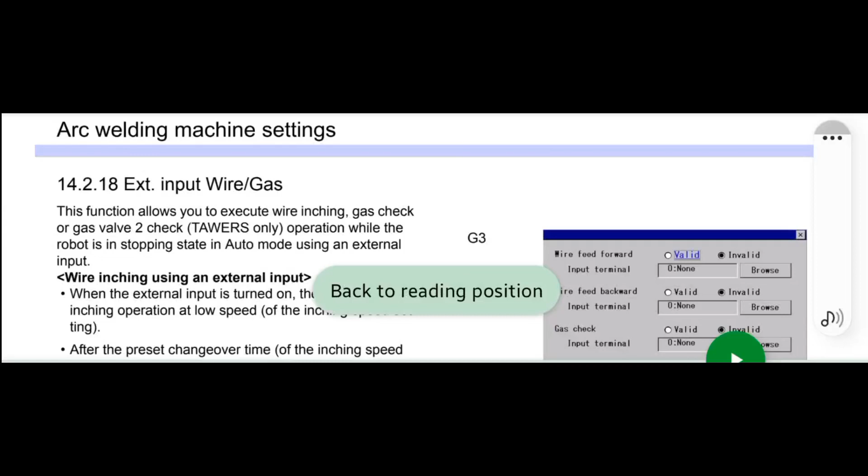14.2.18 Ext. input wire, gas. This function allows you to execute wire inching, gas check, or gas valve 2 check, TAWERS only, operation while the robot is in stopping state in auto mode using an external input.

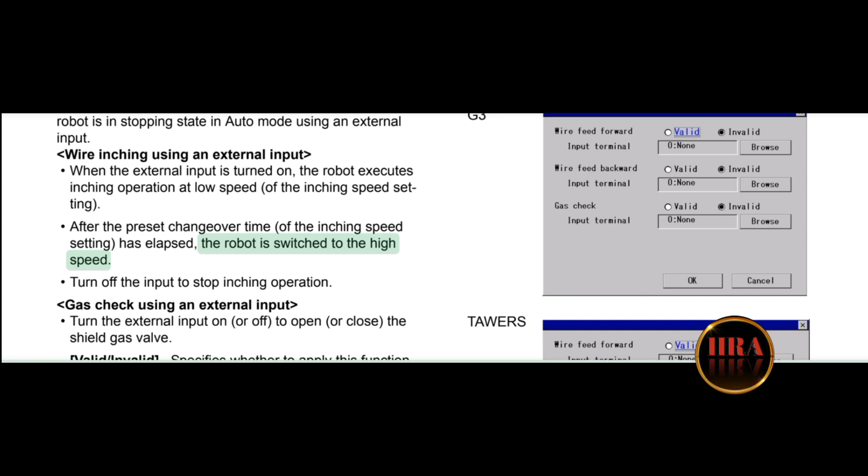Wire inching using an external input: when the external input is turned on, the robot executes inching operation at low speed, the inching speed setting. After the preset changeover time of the inching speed setting has elapsed, the robot is switched to high speed. Turn off the input to stop inching operation.

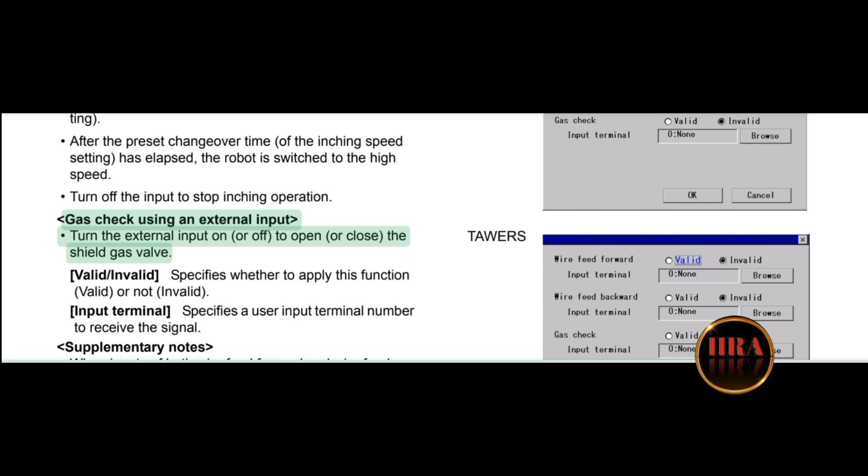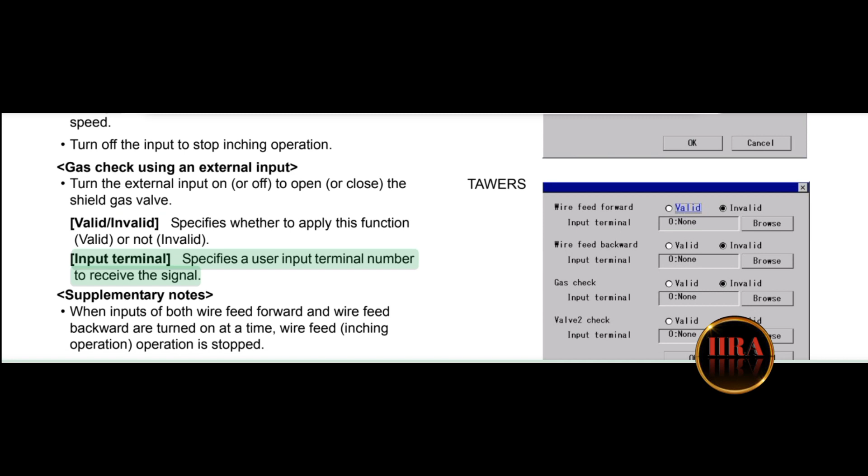Gas check using an external input: turn the external input on or off to open or close the shield gas valve. Valid/Invalid specifies whether to apply this function. Input terminal specifies a user input terminal number to receive the signal.

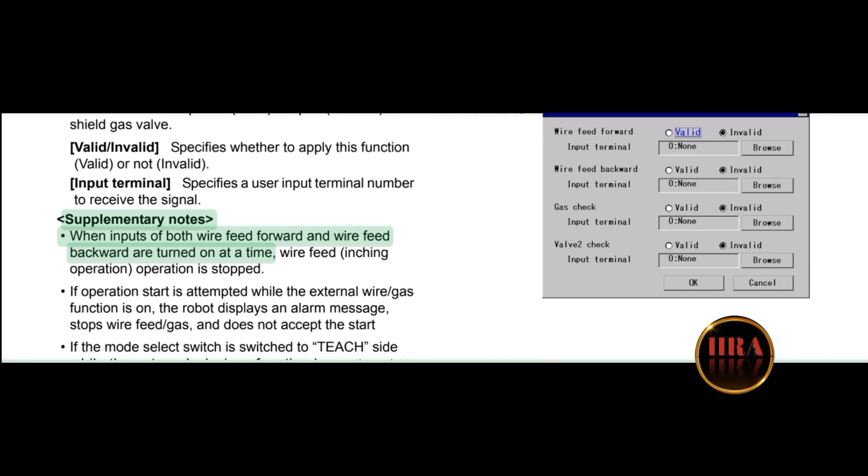Supplementary note: when inputs of both wire feed forward and wire feed backward are turned on at a time, wire feed inching operation is stopped.

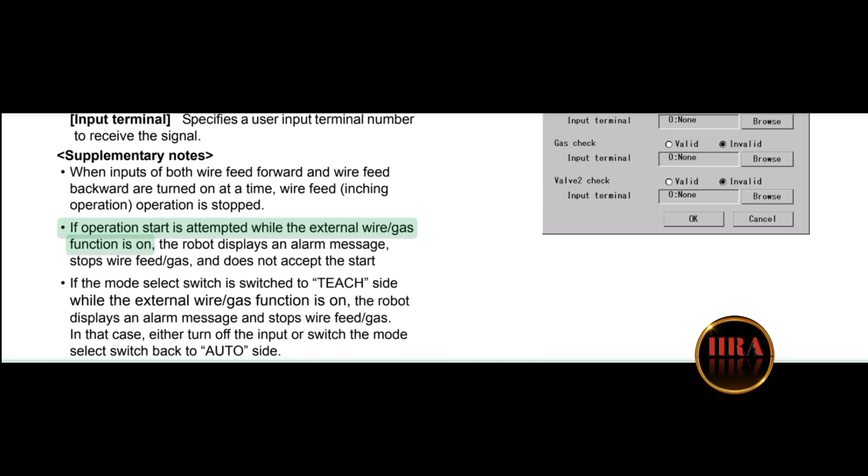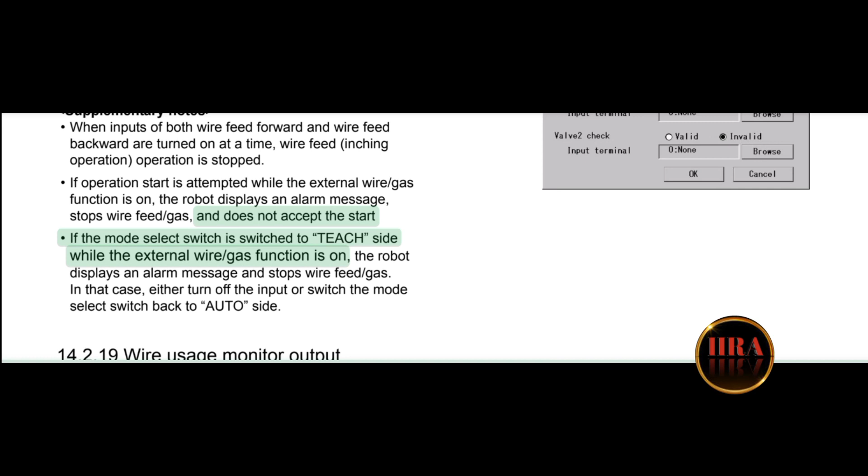If operation start is attempted while the external wire/gas function is on, the robot displays an alarm message, stops wire feed and gas, and does not accept the start. If the mode select switch is switched to teach side while the external wire/gas function is on, the robot displays an alarm message and stops wire feed and gas. In that case, either turn off the input or switch the mode select switch back to auto side.

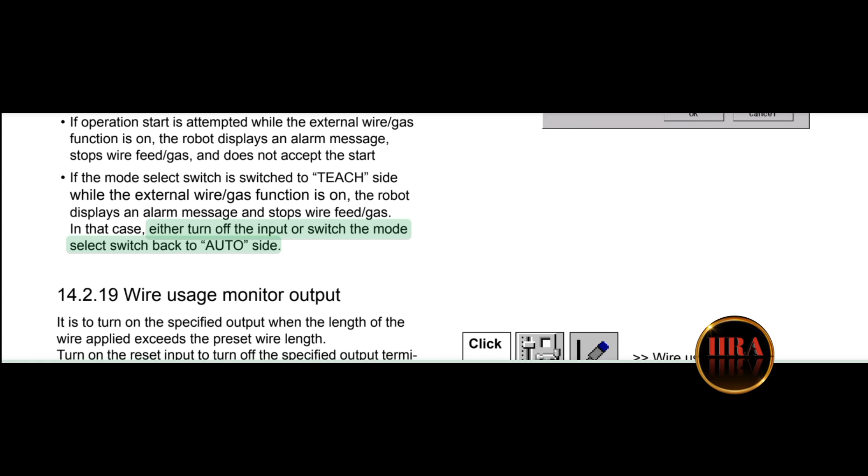14.2.19 Wire usage monitor output. It is to turn on the specified output when the length of the wire applied exceeds the preset wire length.

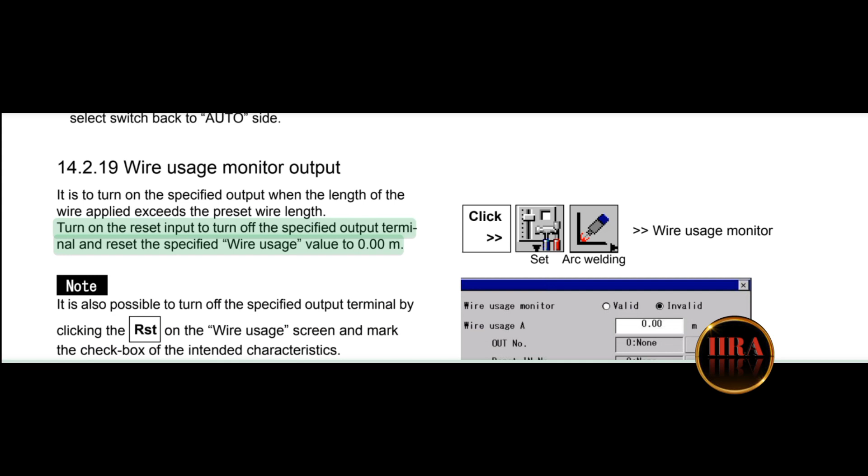Turn on the reset input to turn off the specified output terminal and reset the specified wire usage value to 0.00 meters. Note it is also possible to turn off the specified output terminal by clicking on the wire usage screen and marking the checkbox of the intended characteristics.

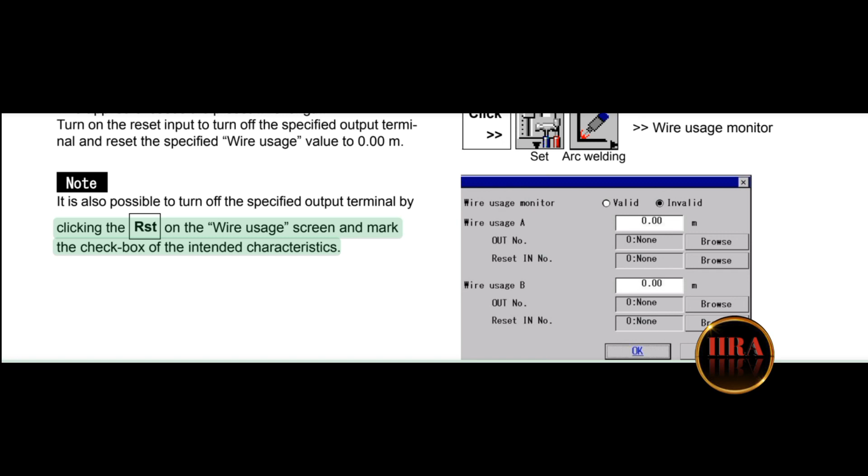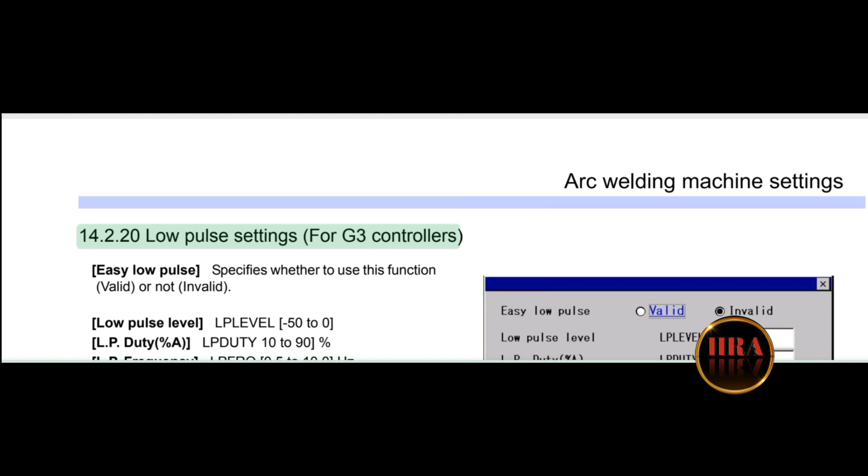14.2.20 Low Pulse Settings for G3 controllers. Easy Low Pulse specifies whether to use this function, valid or not invalid. Low Pulse Level, LP-LEVEL, -50 to 0, LP. Duty %A, LP-DUTY, 10 to 90%. Frequency, LP-FRQ, 0.5 to 10.0 Hz. Delay time, LP-DELAY, -20 to +20.

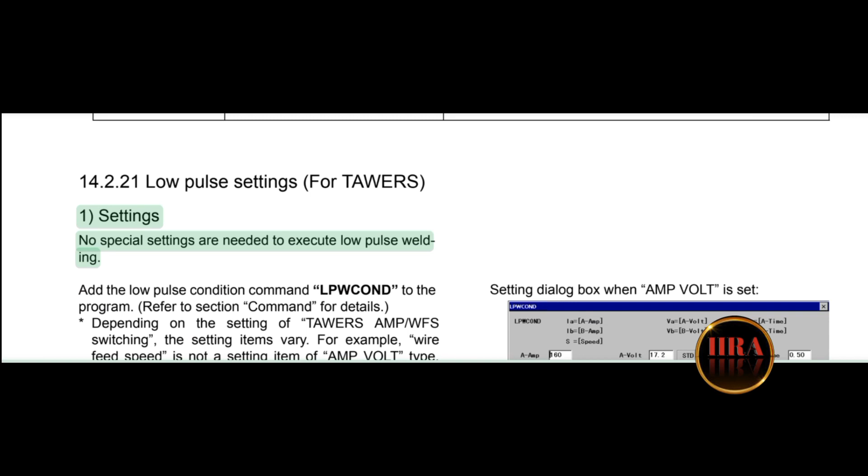14.2.21 Low Pulse Settings for TAWERS. 1. Settings: no special settings are needed to execute low pulse welding. Add the low pulse condition command, LPWCOND, to the program. Refer to the command section for details.

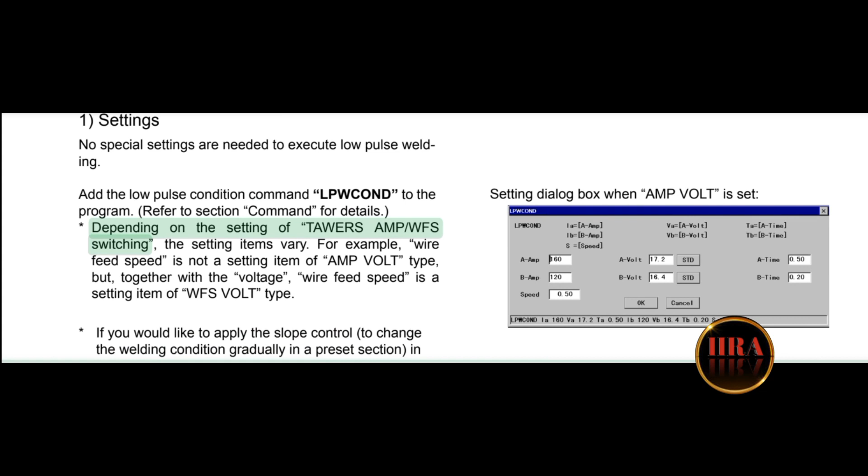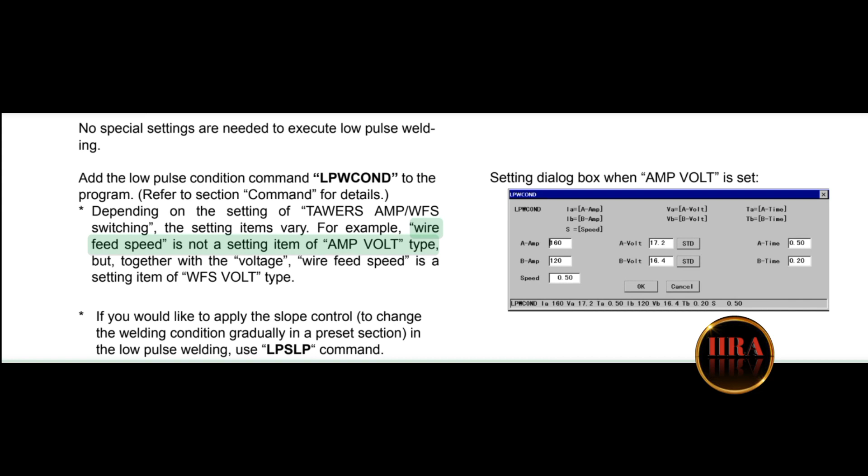Depending on the setting of TAWERS AMP/WFS switching, the setting items vary. For example, wire feed speed is not a setting item of AMP volt type, but together with the voltage, wire feed speed is a setting item of WFS volt type.

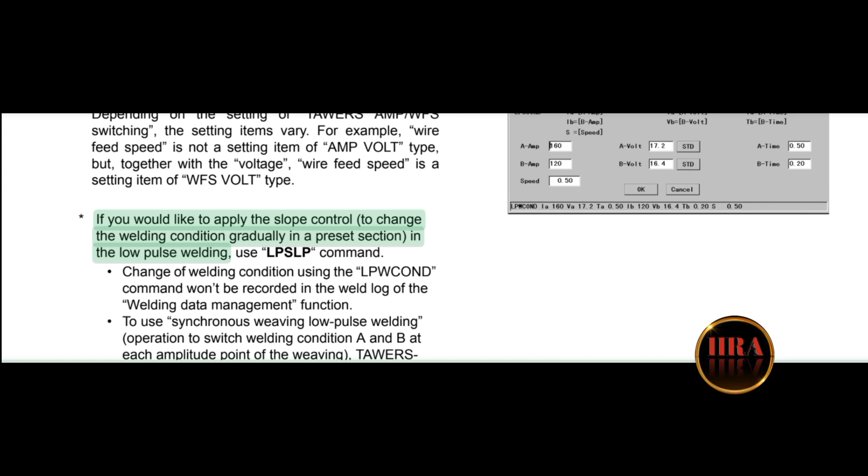If you would like to apply the slope control to change the welding condition gradually in a preset section in the low pulse welding, use the LPSLP command.

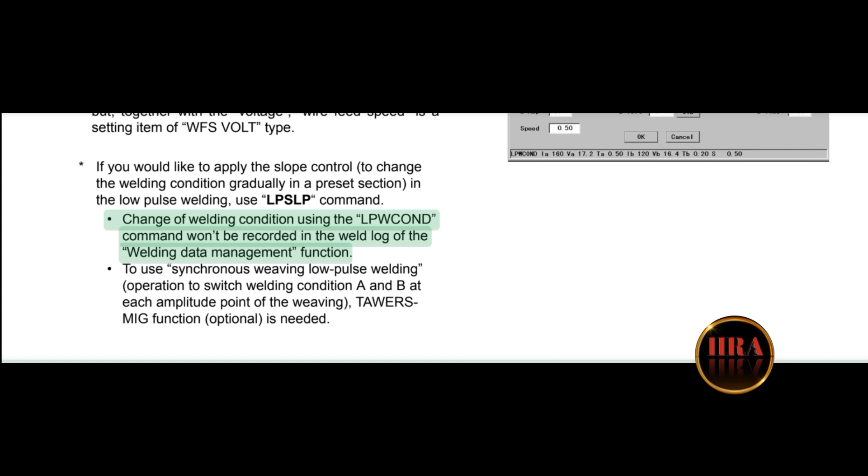Change of welding condition using the LPWCOND command won't be recorded in the weld log of the welding data management function.

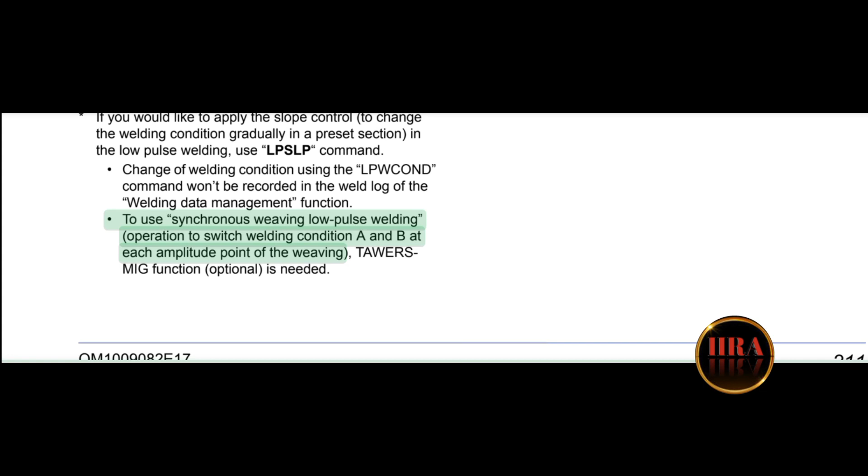To use synchronous weaving low pulse welding, operation to switch welding condition at each amplitude point of the weaving requires the TAWERS MIG function, optional.

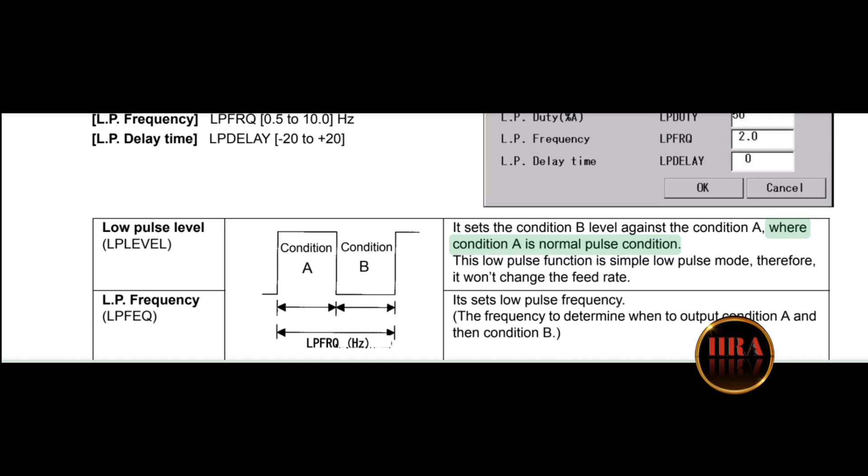Low pulse level, LP-LEVEL, sets the condition B level against condition A, where condition A is the normal pulse condition. This low pulse function is simple low pulse mode, therefore it won't change the feed rate.

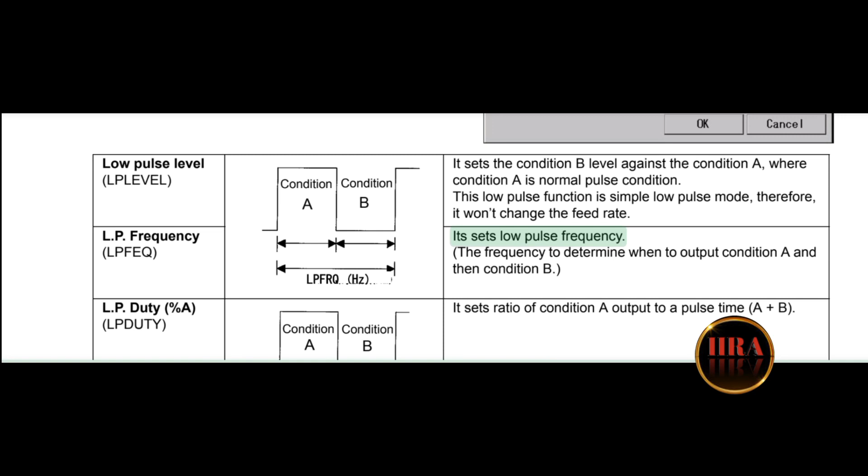LP Frequency, LP-FRQ, sets the low pulse frequency, determining when to output condition A and then condition B.

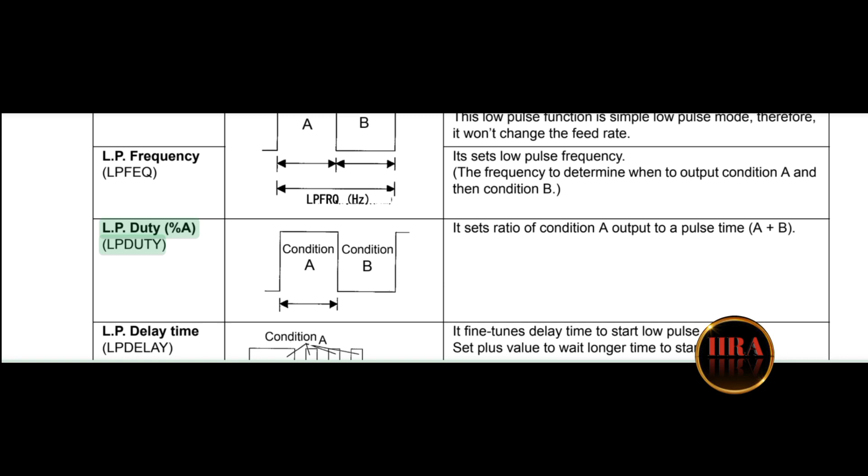LP Duty, %A, LP-DUTY, sets the ratio of condition A output to pulse time, A plus B.

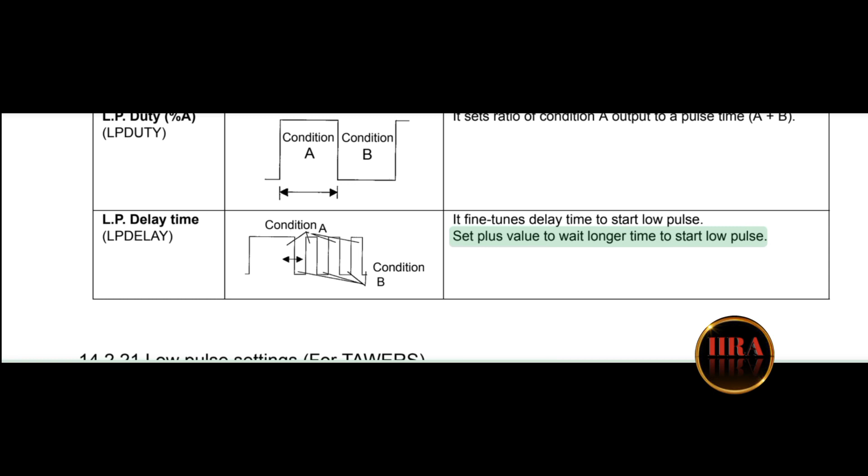LP Delay time, LP-DELAY, fine-tunes delay time to start low pulse. Set a plus value to wait a longer time to start low pulse.

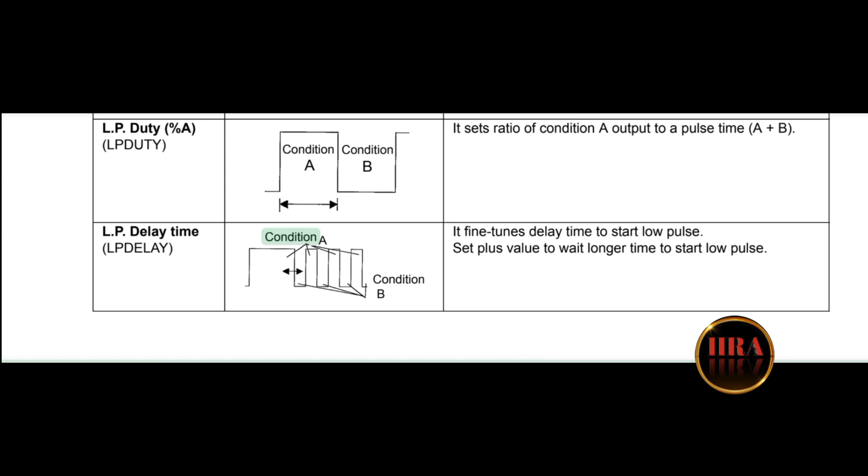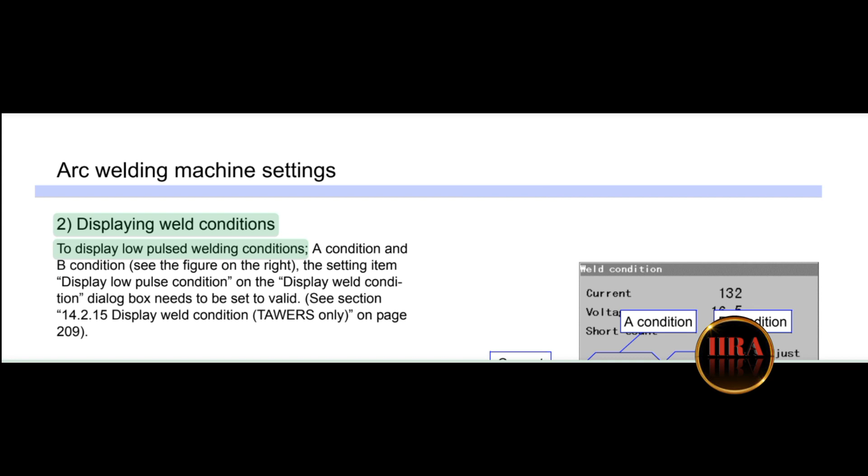2. Displaying weld conditions, to display low pulse welding conditions.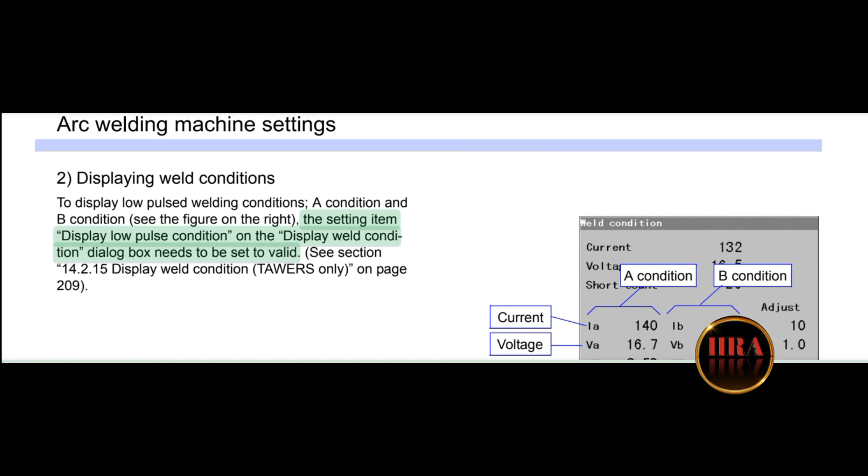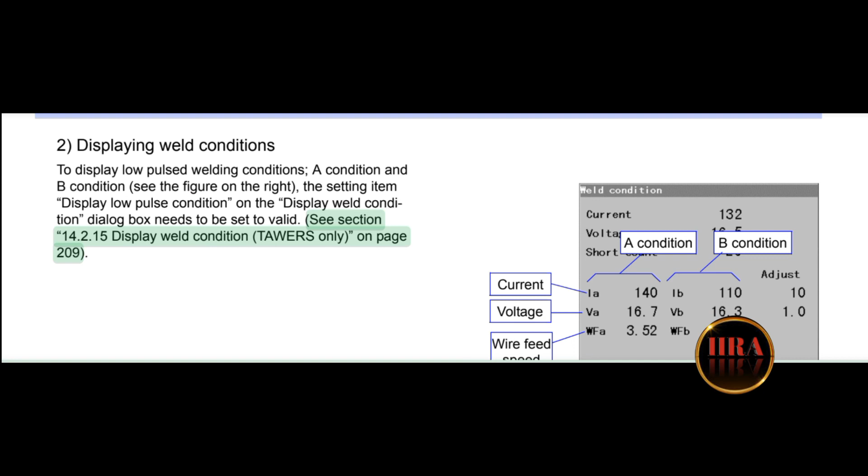The A condition and B condition, see the figure on the right, the setting item display low pulse condition on the display weld condition dialog box needs to be set to valid. See section 14.2.15 Display Weld Condition, TAWERS only, on page 209.

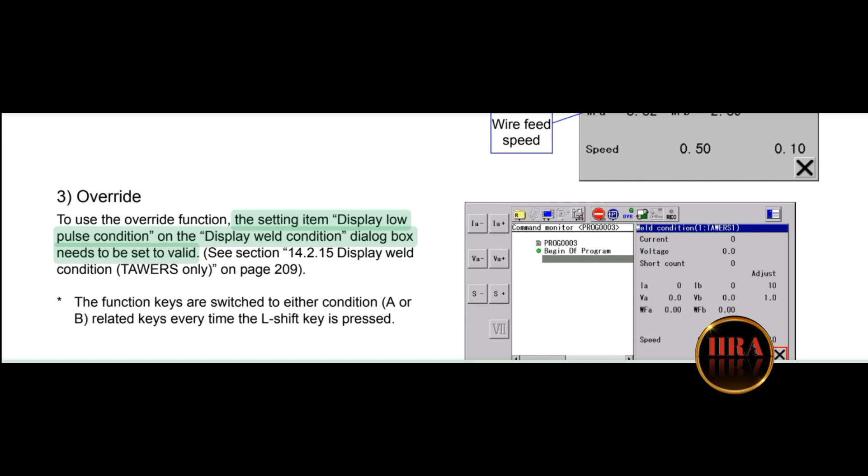3. Override. To use the override function, the setting item display low pulse condition on the display weld condition dialog box needs to be set to valid. See section 14.2.15 Display Weld Condition, TAWERS only, on page 209.

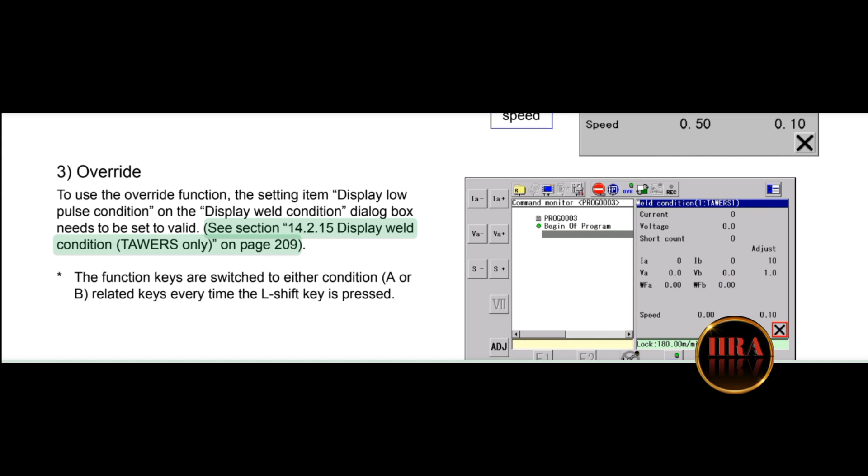The function keys are switched to either condition A or B related keys every time the L shift key is pressed.

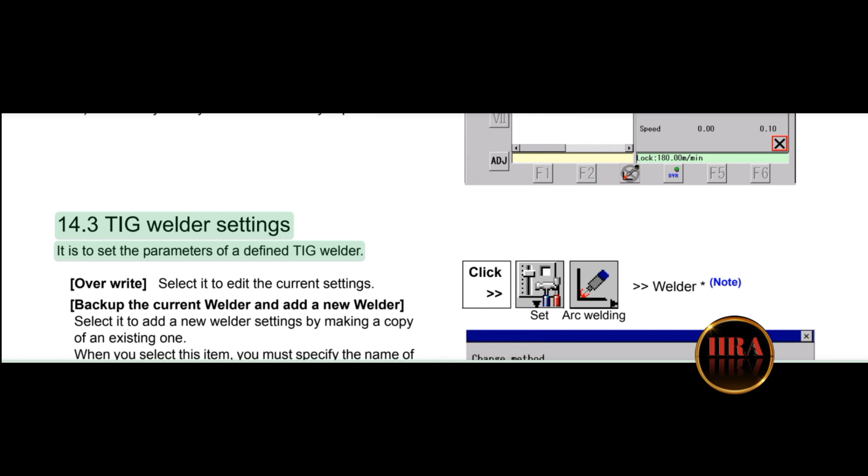14.3 TIG welder settings. It is to set the parameters of a defined TIG welder. Over write: selected to edit the current settings.

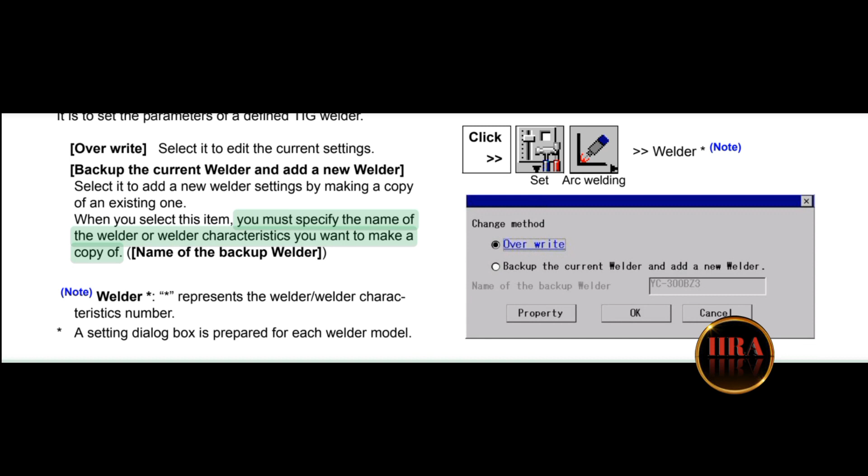Back up the current welder and add a new welder: selected to add new welder settings by making a copy of an existing one. When you select this item, you must specify the name of the welder or welder characteristics you want to copy. Name of the backup welder. Note: welder asterisk represents the welder characteristics number.

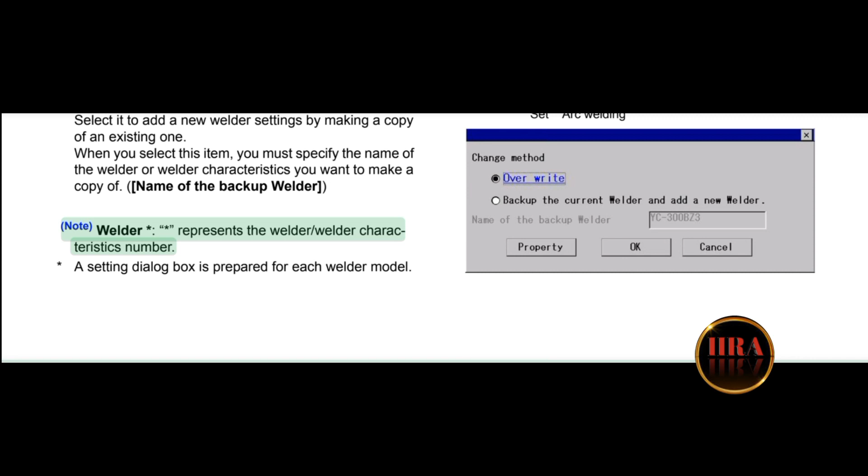A setting dialog box is prepared for each welder model: the A condition, B condition, current, voltage, wire feed speed. Set, click, Arc Welding, Welder asterisk, note, arc welding machine settings.

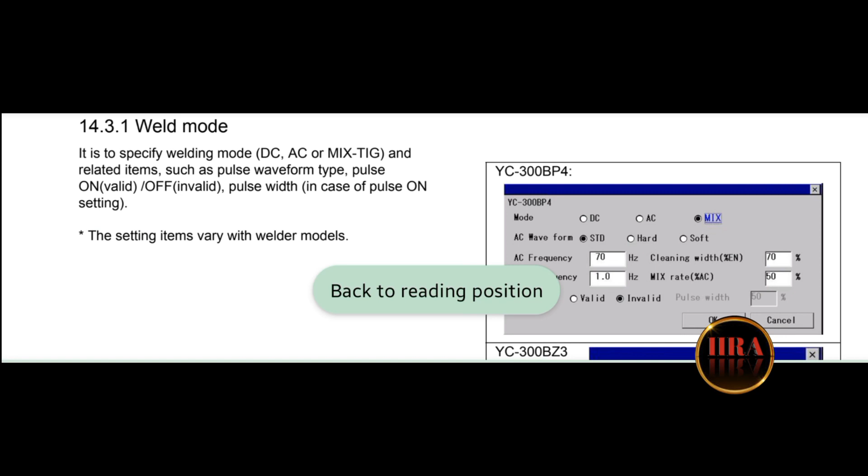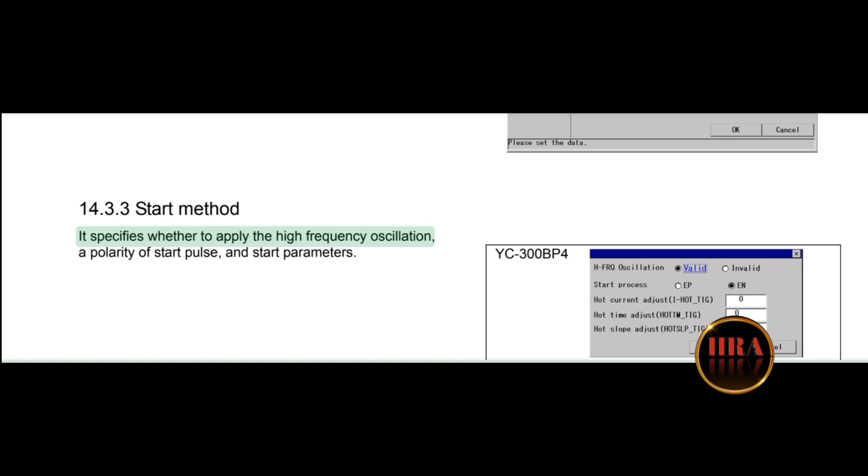14.3.2 Weld condition table. It specifies TIG welding conditions. 14.3.3 Start method. It specifies whether to apply the high-frequency oscillation, a polarity of start pulse, and start parameters.

YC300BP4. YC300BZ3. YC300BP4. YC300BZ3 arc welding machine settings. 214 OM 1009082E17.

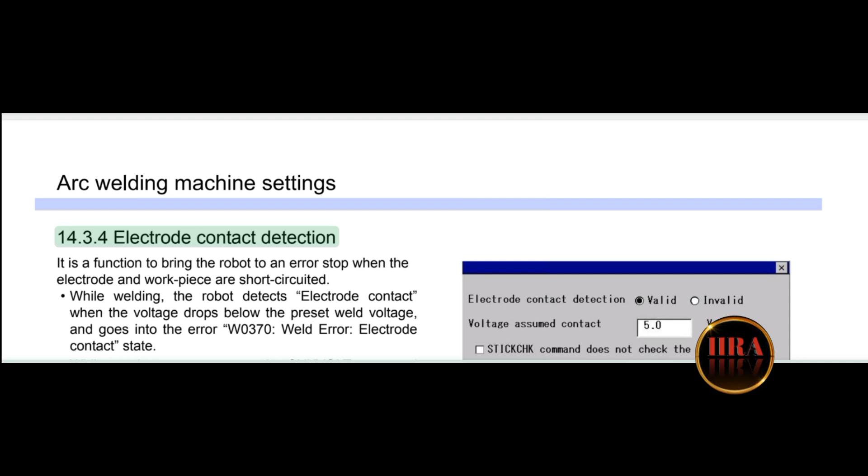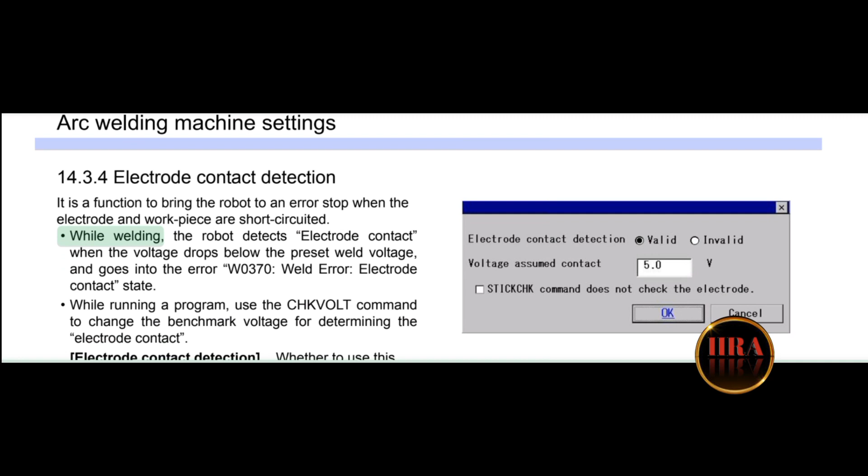14.3.4 Electrode contact detection. It is a function to bring the robot to an error stop when the electrode and workpiece are short-circuited. While welding, the robot detects electrode contact when the voltage drops below the preset weld voltage and goes into the error W0370 weld error electrode contact state. While running a program, use the chkvolt command to change the benchmark voltage for determining the electrode contact.

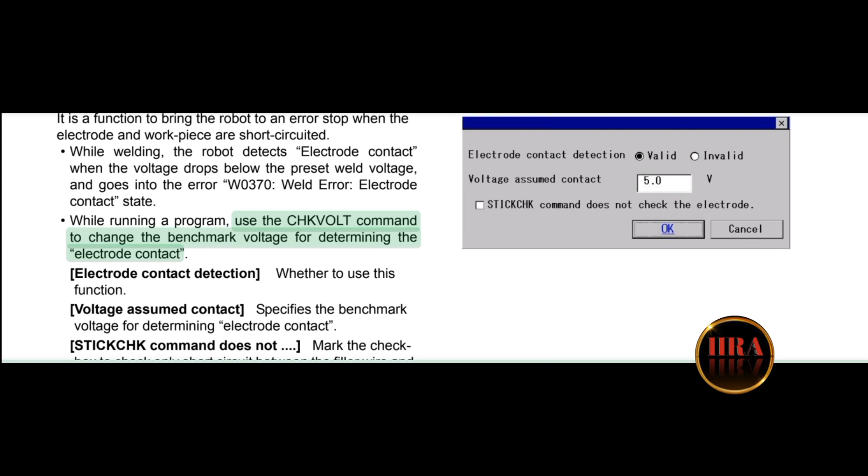Electrode contact detection: whether to use this function. Voltage assumed contact specifies the benchmark voltage for determining electrode contact. STICKCHK command: mark the checkbox to check only short circuit between the filler wire and the base metal, not between the electrode and the base metal, when the STICKCHK command at arc endpoint is executed.

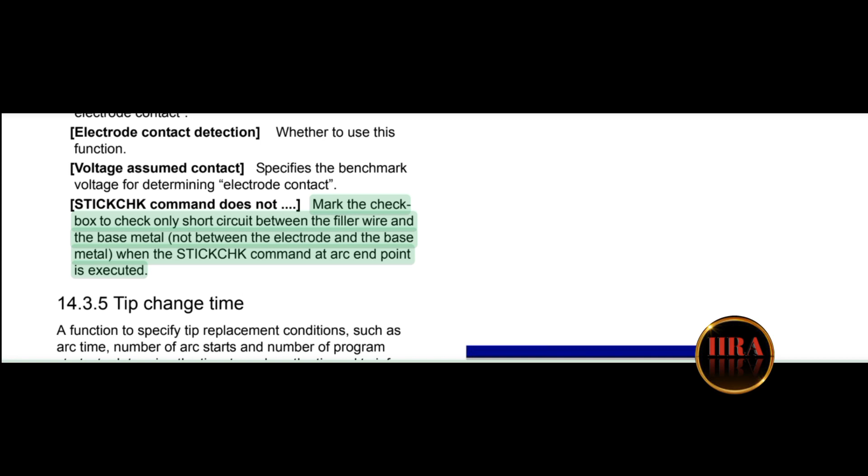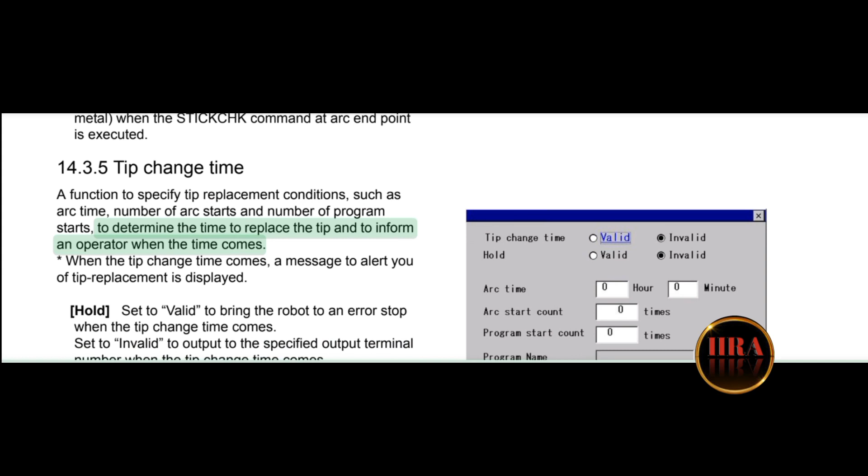14.3.5 Tip change time. A function to specify tip replacement conditions, such as arc time, number of arc starts and number of program starts, to determine the time to replace the tip and to inform an operator when the time comes. When the tip change time comes, a message to alert you of tip replacement is displayed.

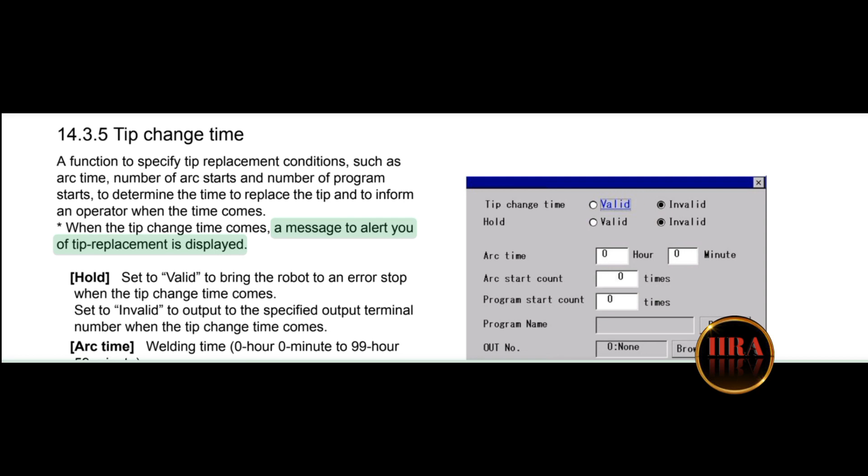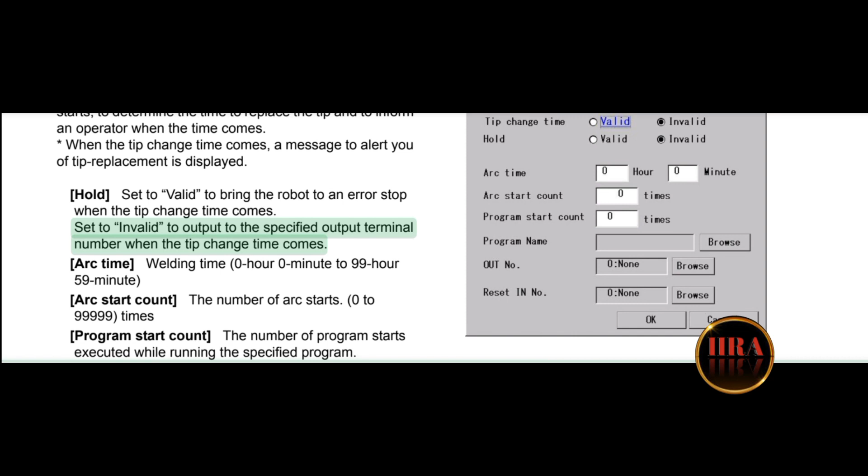Hold, set to valid, to bring the robot to an error stop when the tip change time comes. Set to invalid, to output to the specified output terminal number when the tip change time comes.

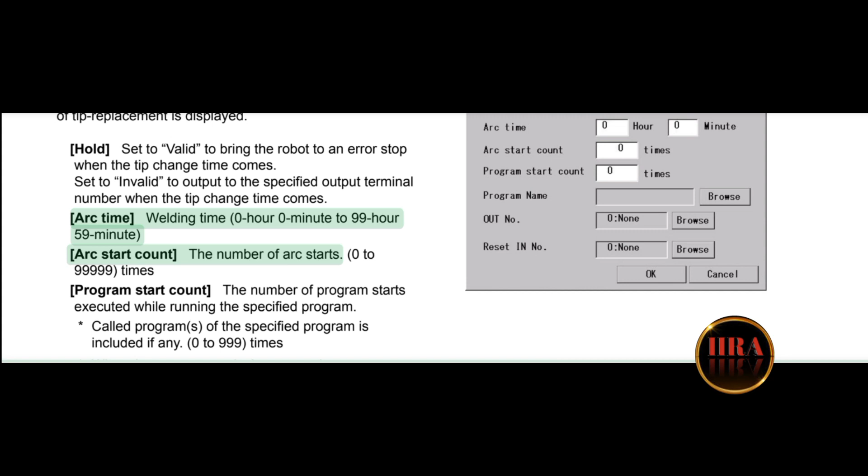Arc time, welding time, 0 hour 0 minute to 99 hour 59 minute. Arc start count, the number of arc starts. 0 to 99,999 times. Program start count, the number of program starts executed while running the specified program.

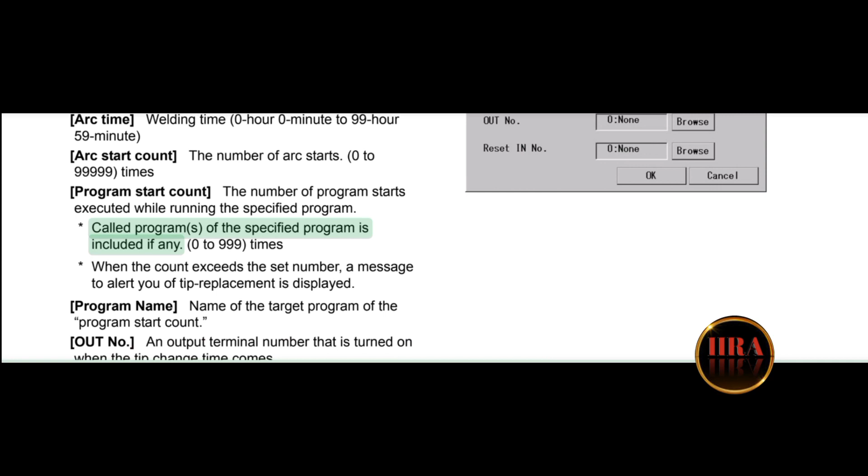Called programs of the specified program is included if any. 0 to 999 times. Asterisk: when the count exceeds the set number, a message to alert you of tip replacement is displayed. Program name: name of the target program of the program start count.

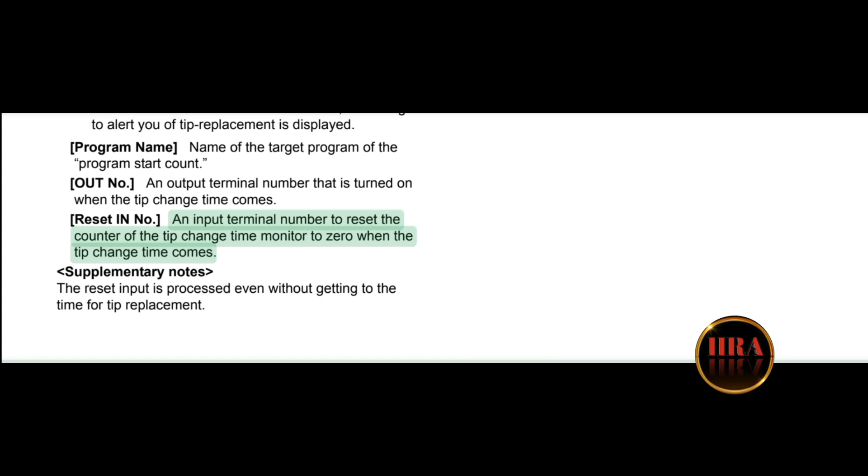Out no: an output terminal number that is turned on when the tip change time comes. Reset in no: an input terminal number to reset the counter of the tip change time monitor to 0 when the tip change time comes. Supplementary notes: the reset input is processed even without getting to the time for tip replacement.

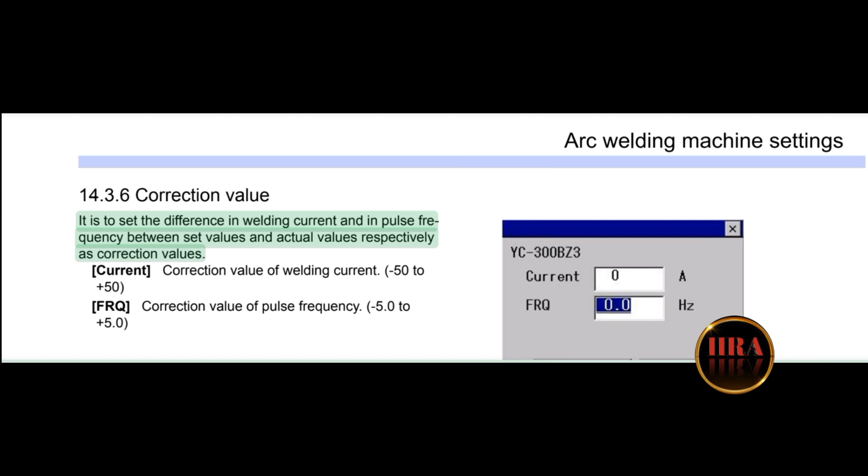14.3.6 Correction value. It is to set the difference in welding current and in pulse frequency between set values and actual values respectively as correction values. Current: correction value of welding current, -50 to +50. FRQ: correction value of pulse frequency.

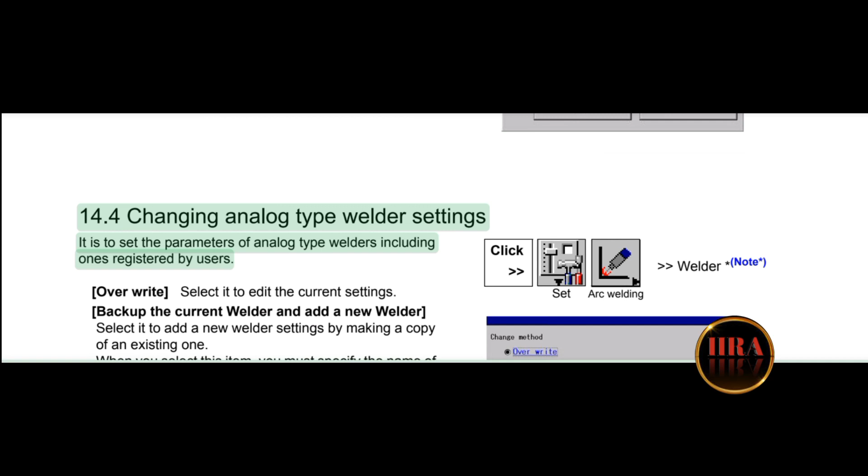-5.0 to +5.0. 14.4 Changing analog type welder settings. It is to set the parameters of analog type welders including ones registered by users.

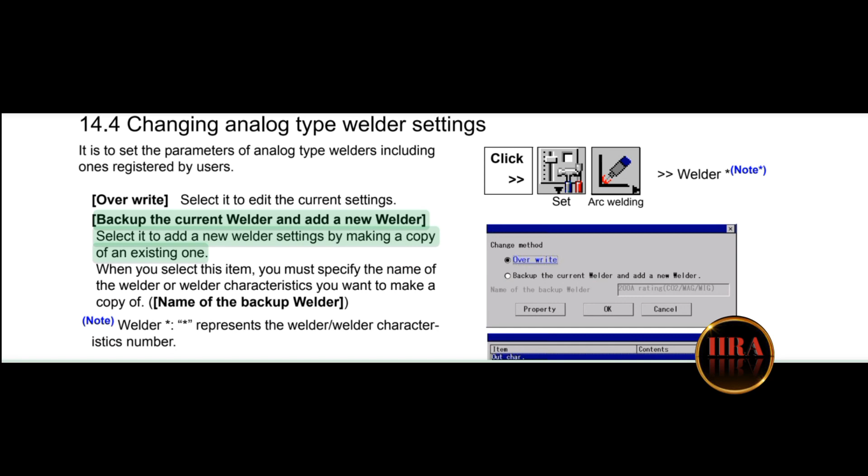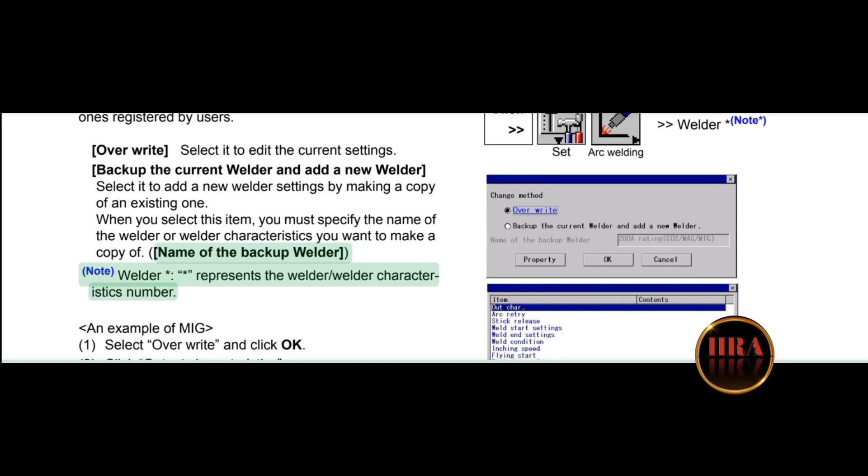Over write, selected to edit the current settings. Back up the current welder and add a new welder, selected to add a new welder settings by making a copy of an existing one. When you select this item, you must specify the name of the welder or welder characteristics you want to make a copy of. Name of the backup welder: note, welder asterisk represents the welder characteristics number.

An example of MIG: 1, select over write, and click OK. 2, click output characteristics. 3, select calibrate by real data, and then click OK. 4, edit parameters and click OK.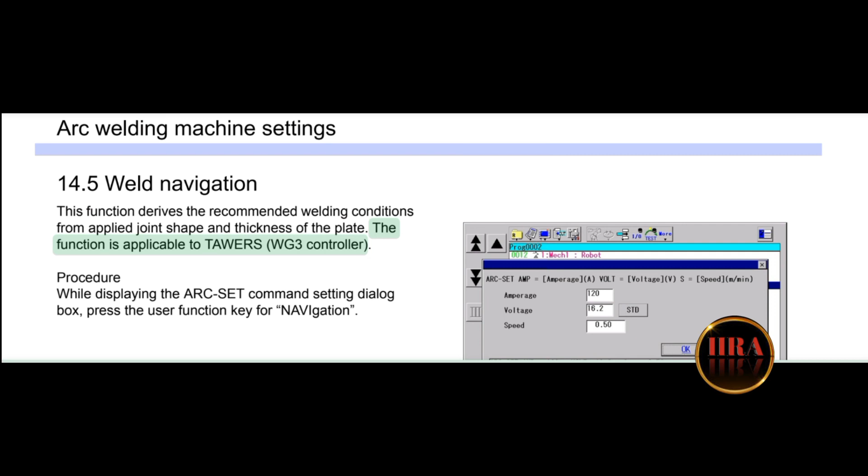14.5 Weld navigation. This function derives the recommended welding conditions from applied joint shape and thickness of the plate. The function is applicable to TAWERS, WG3 controller.

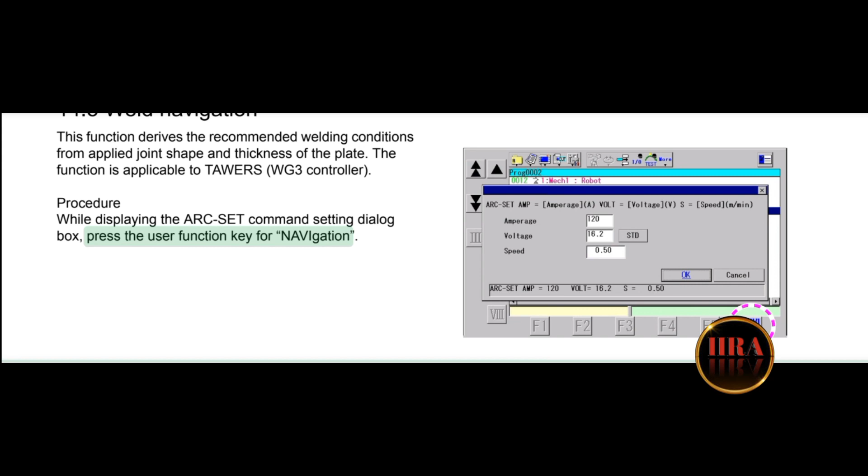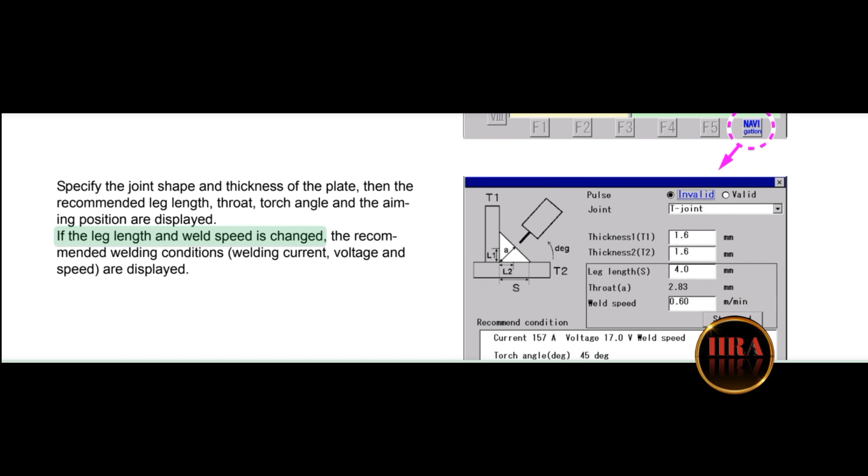Procedure: while displaying the arc set command setting dialog box, press the user function key for navigation. Specify the joint shape and thickness of the plate, then the recommended leg length, throat, torch angle and the aiming position are displayed. If the leg length and weld speed is changed, the recommended welding conditions - welding current, voltage and speed - are displayed.

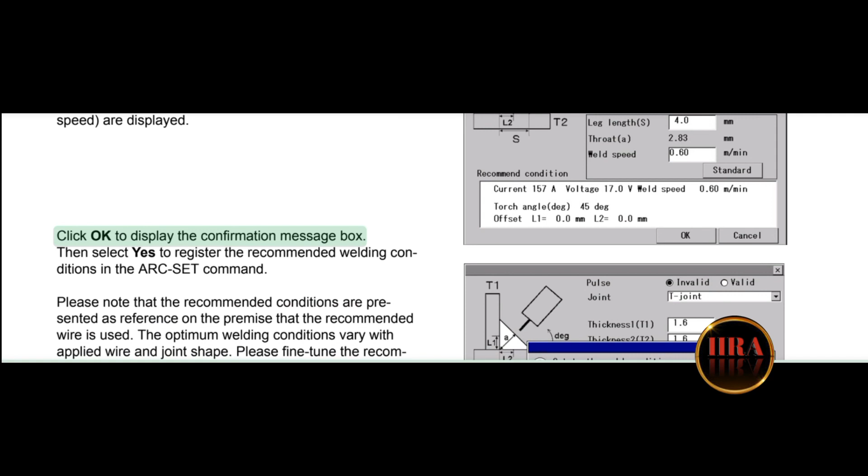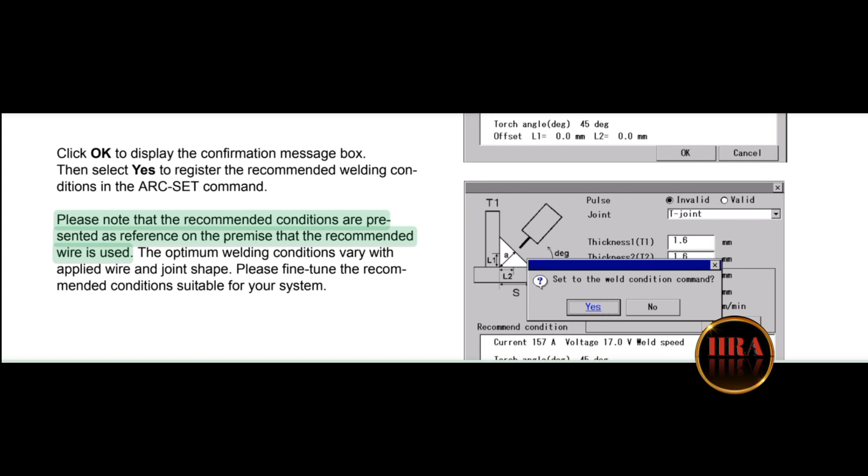Click OK to display the confirmation message box. Then select Yes to register the recommended welding conditions in the arc set command. Please note that the recommended conditions are presented as reference on the premise that the recommended wire is used. The optimum welding conditions vary with applied wire and joint shape. Please fine-tune the recommended conditions suitable for your system.

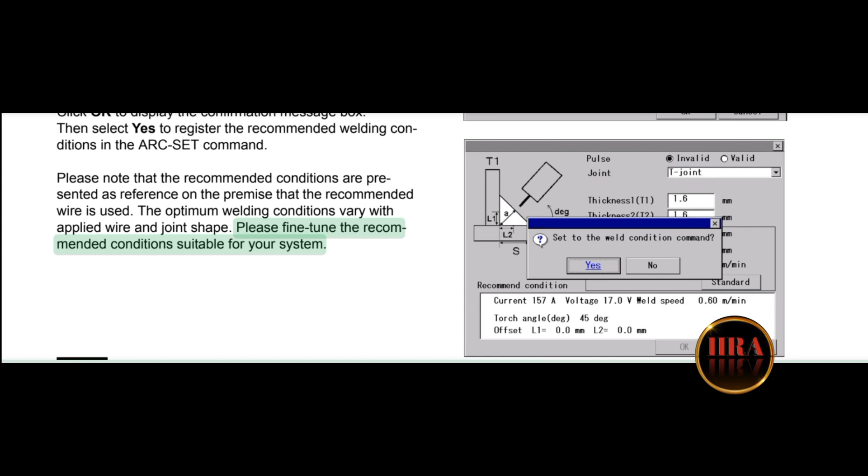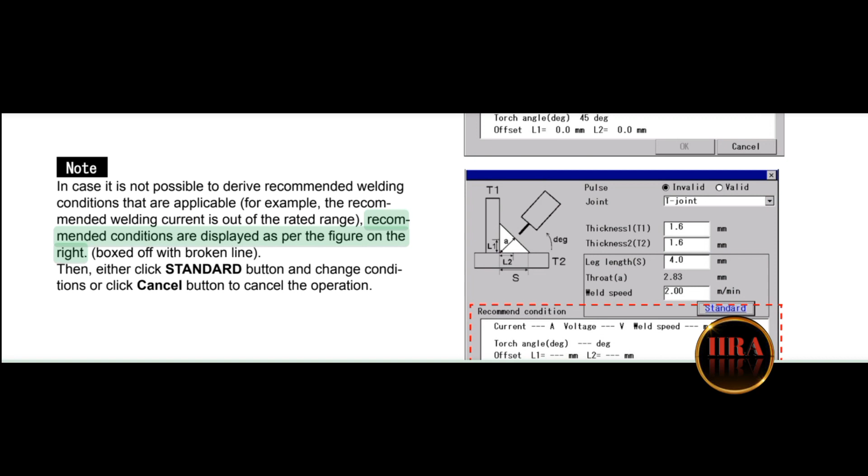Note: in case it is not possible to derive recommended welding conditions that are applicable, for example, the recommended welding current is out of the rated range, recommended conditions are displayed as per the figure on the right, boxed off with broken line. Then, either click standard button and change conditions, or click cancel button to cancel the operation.

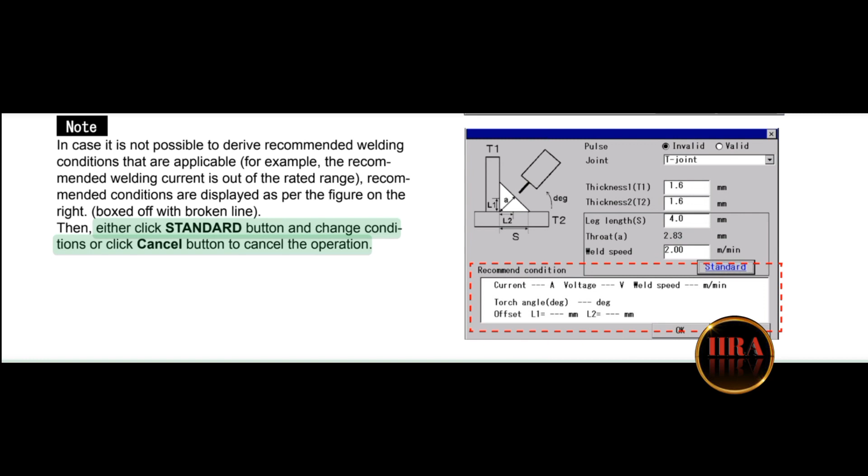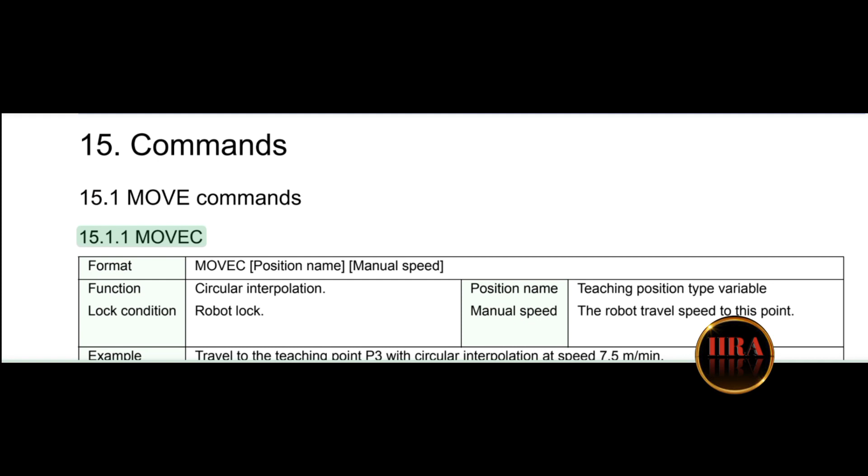15.1.1 MOVEC. 15.1.2 MOVECW. 15.1.3 MOVEL. Format: MOVEC, position name, manual speed, function circular interpolation.

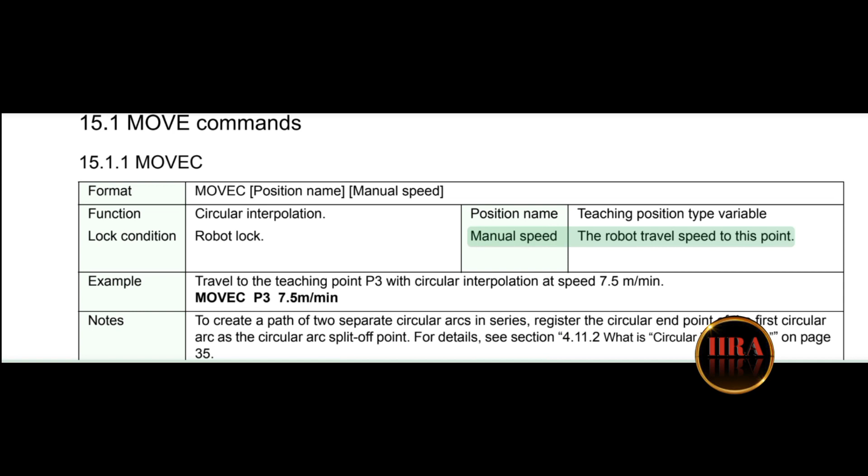Position name: teaching position type variable, lock condition robot lock. Manual speed: the robot travel speed to this point. Example: travel to the teaching point P3 with circular interpolation at speed 7.5 meters per minute.

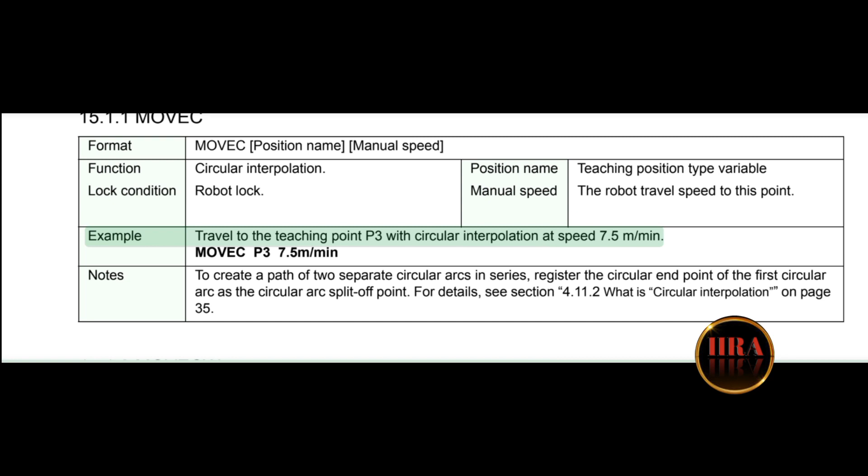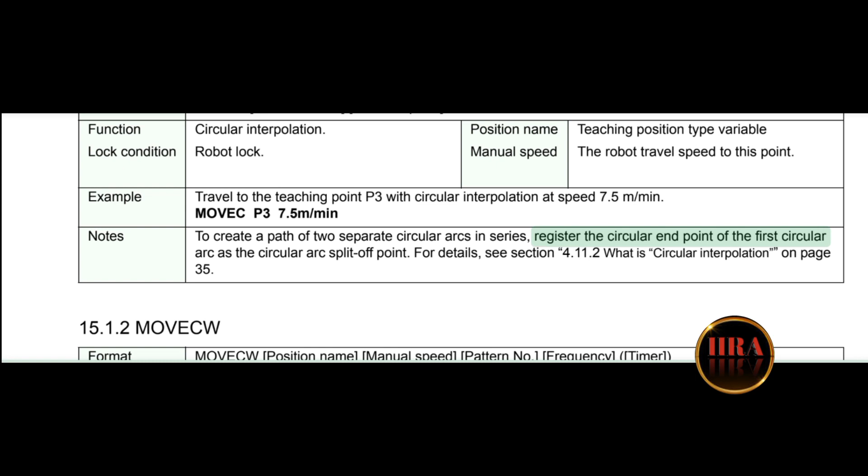MOVEC P3 7.5 meters per minute. Notes: to create a path of two separate circular arcs in series, register the circular endpoint of the first circular arc as the circular arc split-off point. For details, see section 4.11.2 What is circular interpolation on page 35.